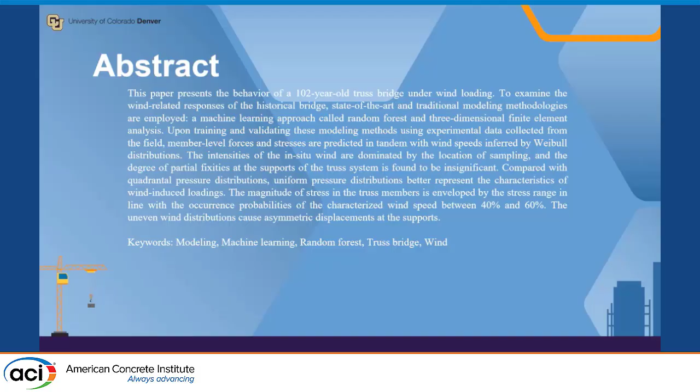So there are many factors which are important and involved in this bridge. The bridge is being subjected to wind loads, and wind loads, of course, are an important factor for every bridge because they're very sensitive, especially for an old bridge, because there is a lot of degradation in the stiffness and also the structural resistance of this bridge.

So a brief introduction about the history of the codes used in this study. An older code which is very important is ANSI A58.1, up to ASCE 7 in 2016, which has been a really helpful resource for this study. Afterwards, this was developed into AASHTO LRFD. And ASCE 7 divided the importance categories and risk factors into 4 different categories.

But this is not the most important one because, as I told you, this is a very important bridge and a very important cultural heritage for Colorado. And after modeling, we also used machine learning to make it very easy and feasible for us.

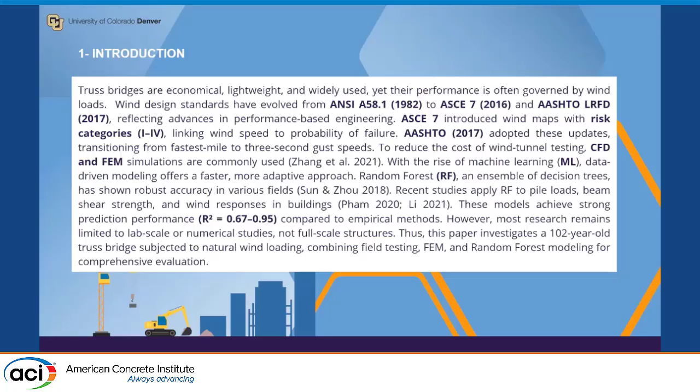Moving on to the experimental program. The steel bridge is 36 meters long by 5 meters wide and 6 meters tall. It's a steel channel bridge with eye bars and hot rolled cables. This steel bridge has a sail attached to it to catch the wind-related responses, which has been used in multiple steps in this research. Afterwards, multiple anemometers were attached to the steel bridge to catch the response of the steel bridge, which is very important.

And also 8 strain transducers, 8 strain gauges, to measure some really important data points. So by the end of this, not lab work, it's field work, 1,104 data points were collected, and then they were used to make the random forest machine learning model and 3D finite element models.

So that made a full-scale test which captured authentic boundary conditions. Unlike other ways to model real bridges, this is the most effective one, as we found out, because other ways would involve wind tunnels and very expensive methods. So on the left side of this slide, you can see the bridge, and at the lower side, the modeling part of this bridge with the associated dimensions.

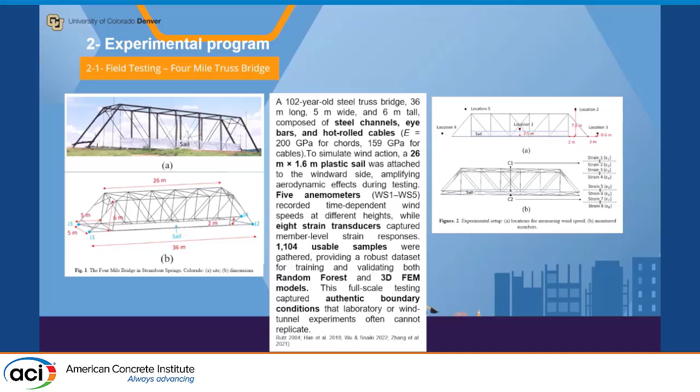So moving on to the experimental program second half, which is the wind-induced force from strain to axial load. We need to transform strains to axial load. And how do we do that? We do that through this equation, Ft1 equals EA times the sum of strains over 2. And that will give us axial forces Ft1 and Ft2, which are shown in the left side of the slide and explained to be A and B.

And by the end of that, we have to also calculate the wind pressure, which is a very important factor for this study. So the pressure was measured by this equation, P equals half rho V squared, where rho is 1.225 kilograms per cubic meter, and V is the wind velocity measured in meters per second.

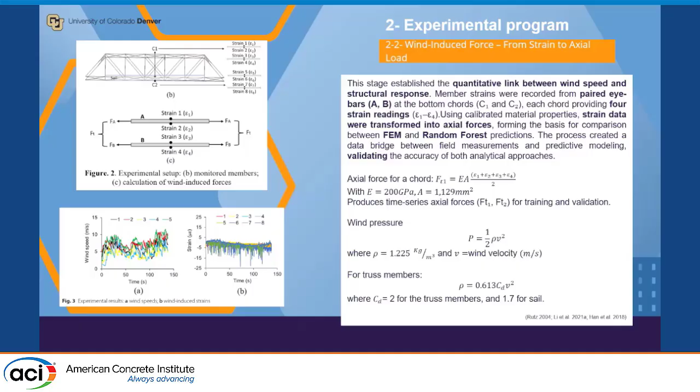For the truss members, there is a very important equation which has also been used. P is 0.613 CD multiplied by V squared. So CD is also a very important factor, and V is also the speed of the wind.

Moving on to the characterized wind speed, which has been obtained by the field work. There are multiple factors which have been used and modeled throughout the entire process of doing this research. And this equation is also one of the most important ones in this research. So this equation has been used to make the finite element and also the machine learning process by employing Python code for the machine modeling part, and also using the data from the 5 anemometers which were mounted in the bridge.

On the left side of that slide, you can see some data which has been collected from the 5 calibrated sensors, which have been developing different results depending on the location and the height of that sensor. So by completing this process, there was a lot of data collected. It's a range of realistic wind intensities from low probability to extreme probability, which is highly unlikely to happen in this case, which is 99%.

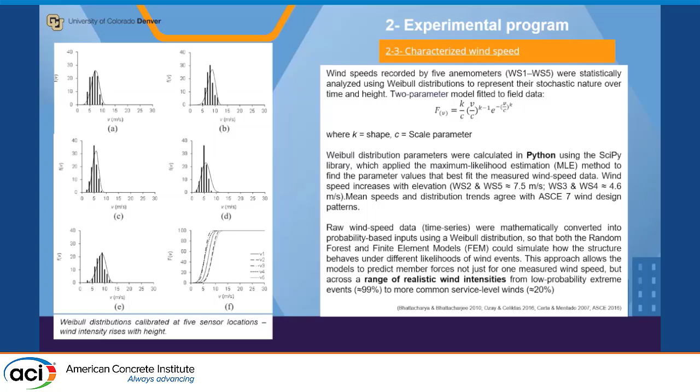So moving on to the modeling part and combining that with the random forest machine learning, there are multiple steps in achieving this, and the most important one is doing the decision trees. So for this research, 500 decision trees were made, which were later combined to make the whole data set, which has been used to train and also validate the model.

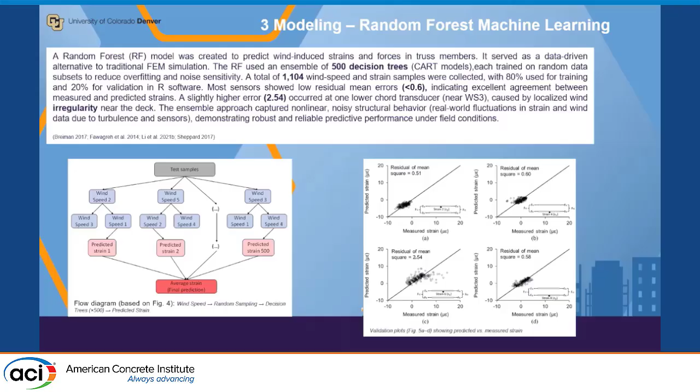But there is one little off reading which was near WS3, strain gauge number 3, which was likely due to maybe some failure in mounting or maybe some failure in wiring. So that was the only one which didn't give a consistent reading with the other strain gauges.

But by the end of doing the modeling part, we found out that the most common and most effective way is a uniform wind distribution, which gave the most realistic results, and also when compared to different ways of modeling, it gives really low error results.

But going back to the wind pressures which are necessary to model this bridge, one important factor is the pressure, which was calculated using this equation that you see in the slide. P equals 0.613 CD V squared. So CD is a shape-dependent drag coefficient, and it had two different numbers. One of them is 2, and the second one is 1.7. One is for the shape, and the other for

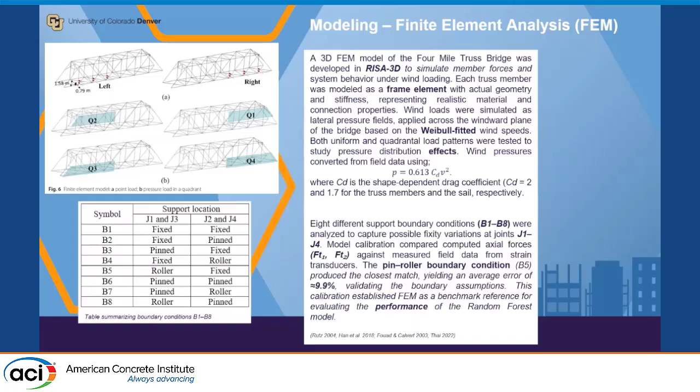So moving on to the results and the wind speed boundary conditions, as I told you, the most effective results after applying the ASCE 7 design profiles confirm that the accuracy of the results from the machine learning and also the modeling part really give a good fit with very low errors and a very low percentage. It's only less than 10%, it's 9.9%.

But also, there are some good results that came out from modeling this wind distribution by different factors, and that's the Weibull distribution and also the uniform wind distribution. So both of them really did give some good results, but the uniform wind distribution gave the most convenient and most accurate results.

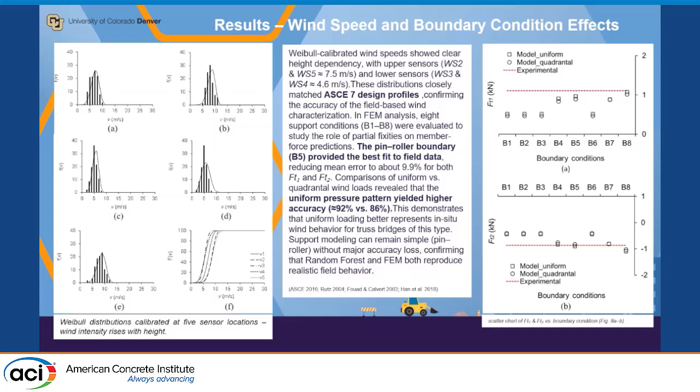So going forward, by comparing the modeling and also the machine learning, we found out the C1 and C2, which combined the readings of the different strain gauges, and that gave us some good insights about the modeling process and how effective this modeling process and using the machine learning is.

So when combining different methods for the experimental and finite element and also the random forest. For the finite element, there are, as I told you, two different ways, uniform and quadrantal wind distributions, which is very important because you don't really know how wind will react in the real case. But for the sake of simplicity, we found out that the uniform wind distribution is the most effective.

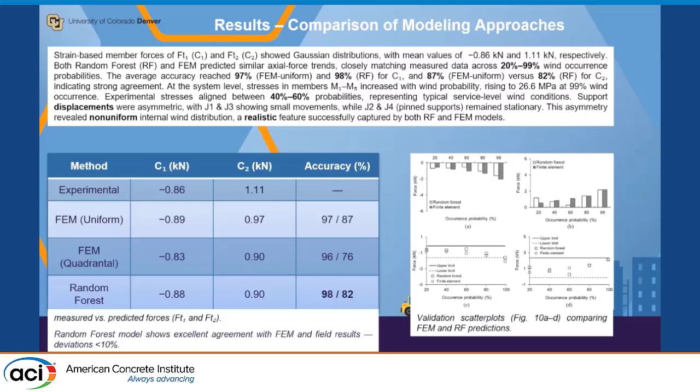As you can see on the lower right side, there are different graphs which we obtained from comparing the different finite element methods and also the random forest by using the learning models, which proved our assumption. And even very high ratings in some cases for the intensities of different wind speeds.

So as a result of that, as I was saying in the very beginning, when we use the Weibull distribution, we managed to obtain very high occurrences, which were really fitting the real case of the wind distribution and wind intensities, and that's between 40 to 60%, which happened to be very acceptable by the ASCE code of wind.

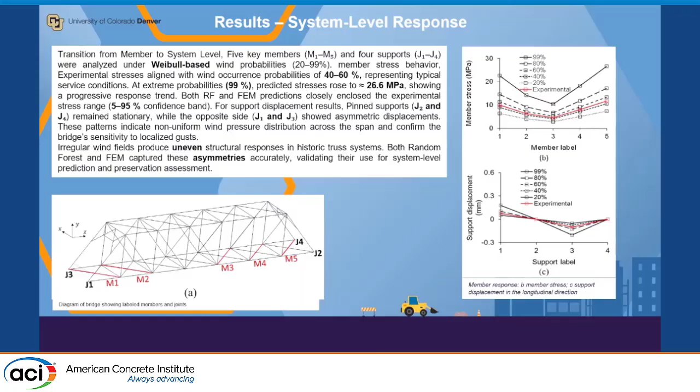And then afterwards, by combining them and doing the analysis for different factors, as I told you, due to different degradation in stiffness and also the resistance and also the asymmetry of the wind distribution, there are some not very consistent results. And that's why we get those different readings. And also on the right side of the slide, we can see different observations with that.

As a summary, we can say that the random forest machine learning process, combined with the 3D modeling and the real field data, is a very important and cost-effective tool, instead of just using wind tunnels and very high cost ways, to make it possible to manage and test very old steel bridges and other applications where we can use this machine learning process. We proved that it's very possible with really low error rates. As we discussed, it's only less than 10%, so it's very acceptable.

And then after comparing different wind distributions from the uniform and quadrantal, we managed to get 92% to 86% by comparing the different modeling methods. As I said, uniform wind distributions outperform the quadrantal wind distributions. So it appears that the uniform wind distribution is the most realistic case which applies to the wind distribution.